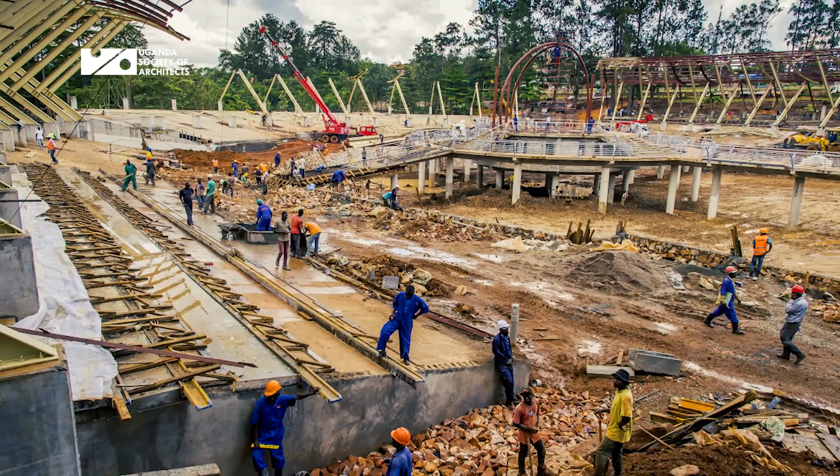My boss, architect Matoya, architect Ian Senkatuka, and architect Stephen Ochola handled the bidding process. Then myself and a colleague of mine called Martin Bongomin, and another colleague called Oyo Cuthbert, we were the boots on ground. The firm is called Creations Consult Africa Limited, also in Kampala, Nakasero Hill Road.

The client was the Catholic Church, and the legal entity was called the Registered Trustees of Kampala Archdiocese. It was led by the Archbishop and many of the other bishops, as well as the Shrine Rector, Father Vincent, who is at Namugongo. The government was involved as well, so we had quite a number of meetings with the Prime Minister's Office, Ministry of Works, Ministry of Tourism, and those were the entities responsible for the project.

The project was really to redevelop the UNESCO World Heritage Site, which is located in Namugongo. The whole estate is about 34 acres.

In 1886, Kabaka Mwanga, the king of Buganda, ordered the execution of martyrs. Some of the martyrs were killed right at Munyonyo, others were killed somewhere Owino Market currently is, and the rest were killed at this place. It was quite far at the time, maybe a 30-40 kilometer walk from Munyonyo. So the guys were killed and burnt at this place.

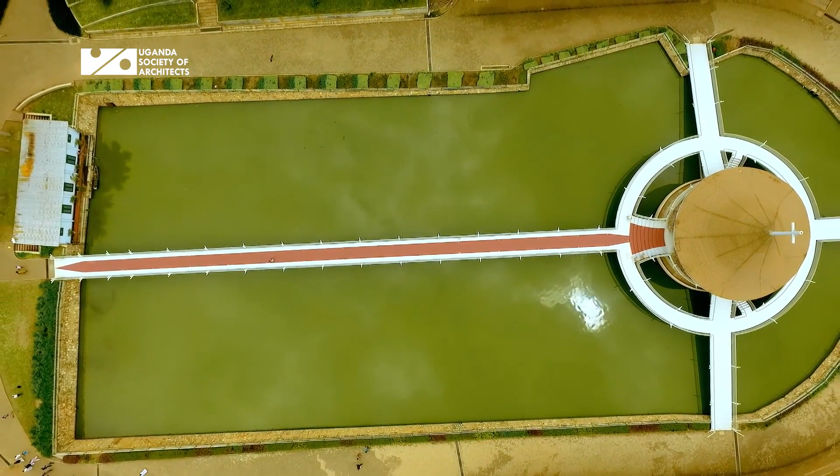What happened then was, after they were killed where the existing basilica is, the guy in charge of the execution was called Mukajanga. After Mukajanga and his people killed them where the basilica is, they went down to what was a swamp at the time and washed their blades and spears in that water. So people who are in the Catholic faith believe that this water is holy water because it has the blood of these saints.

The head of the martyrs at the time was called Balikuddembe, and he was killed right where the existing basilica is, and I think buried there as well. So that spot where he was killed is where the current altar is.

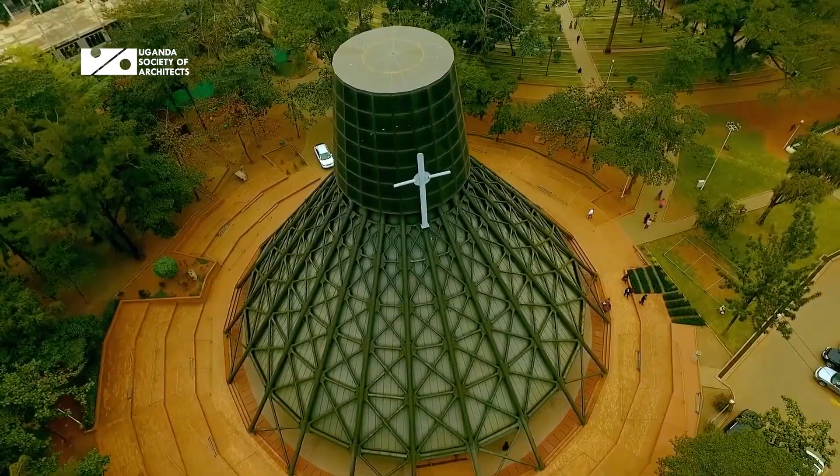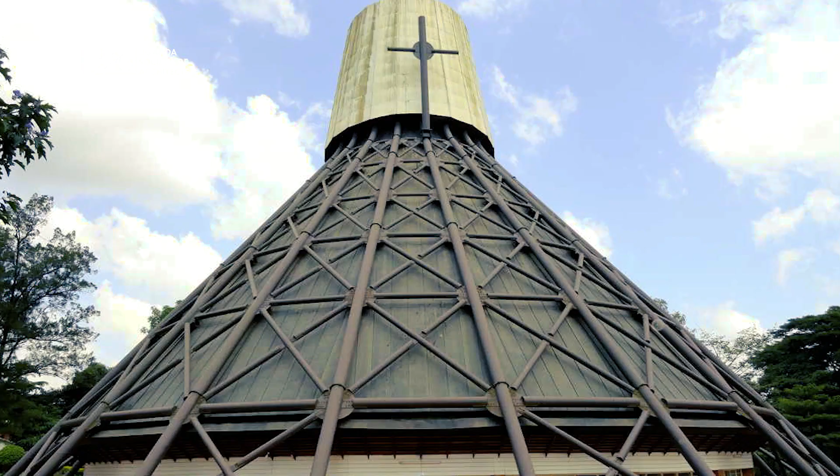Now in 1964, there's a whole process of making you a martyr, which is called canonization. That happened in 1964, and that's when this church was first built. Originally, it was built by Idi Amin when Pope Paul VI was coming to Uganda to make his pilgrimage to where these guys were killed, were executed. And so that's when that basilica was built.

Originally, it was just a shed, just a roof and a floor. It was built in the 1960s by Roko at the time. So when it came to choosing a contractor for this project in today's time, they looked for the same construction contractor, basically. So you'd find that from the fathers to the sons, the project had been shifted.

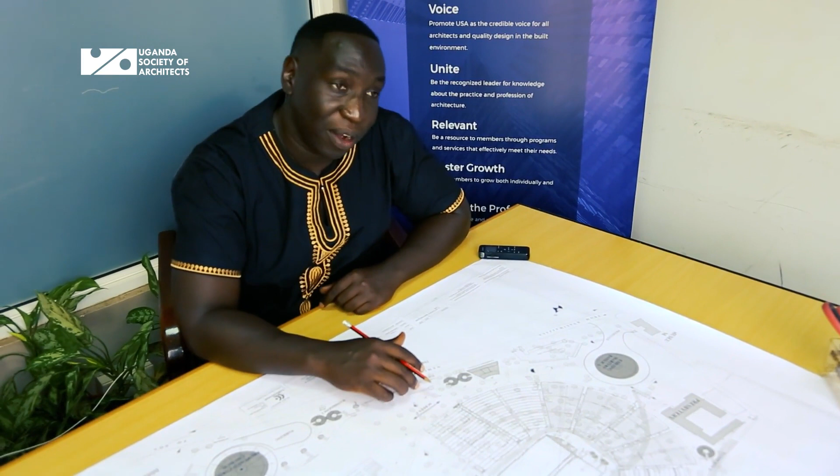What happens now is every year on the 3rd of June, which is the commemoration of their execution, there is a whole pilgrimage that takes place in this place. People walk from as far as Tanzania, from as far as Ethiopia. People walk all here to come and perform their pilgrimage. So what happens is you can have up to 1 million people on this ground, which is 34 acres.

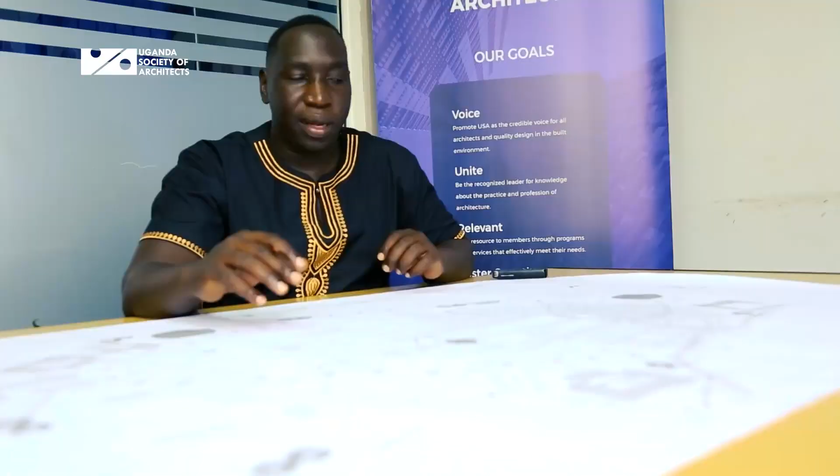So the project, because of having all those people, and Pope Francis was coming in 2015, the Catholic Church, together with the government, decided that we need to redevelop it and make it habitable for the 1 million people. Deal with issues of crowd control, washrooms, a place where people can camp. We wanted to add a new parish church so that we could leave the basilica for special events. We had to add parking for some very special guests. We had to clean up the lake, change the altar. There was a lot of work that went in.

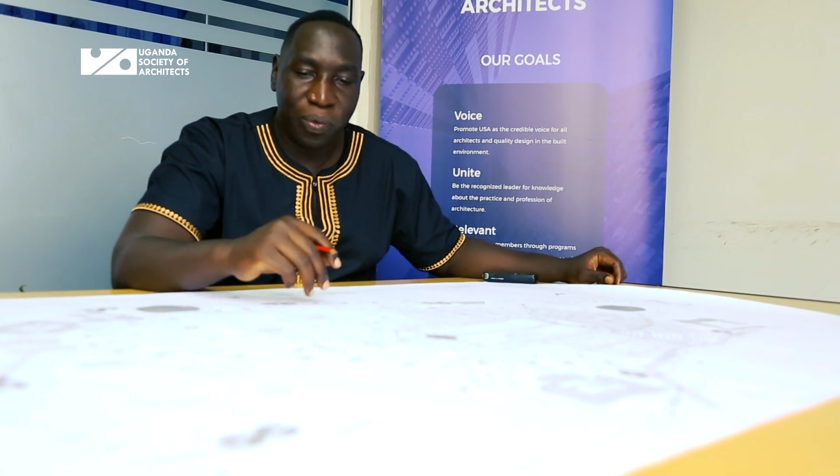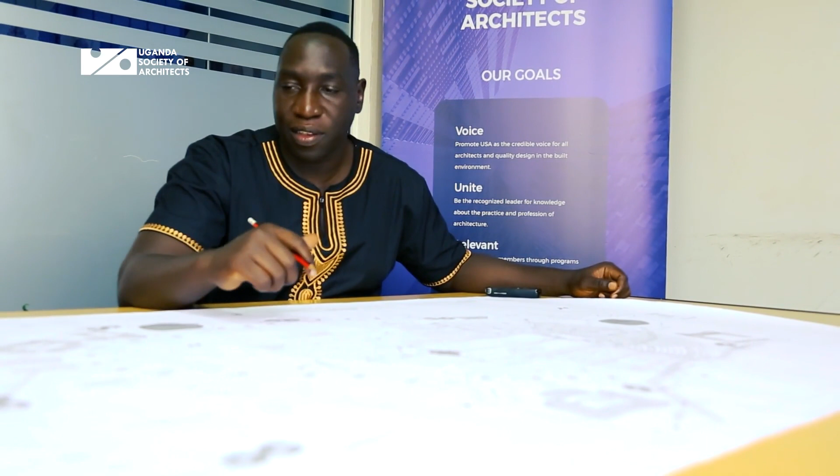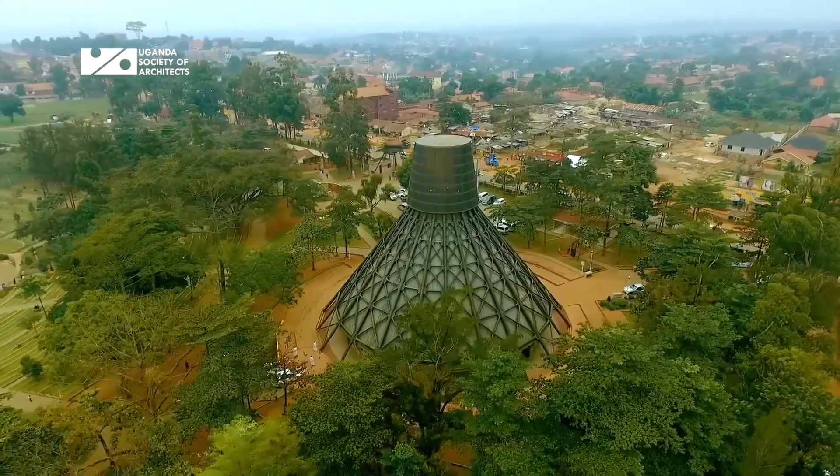In terms of budget, if anyone is thinking, it was about $16 million in total, and that was for phase one. There are still many other phases to do, as you'll see. So what we did, we took the whole 34 acres and tried to figure out what to do.

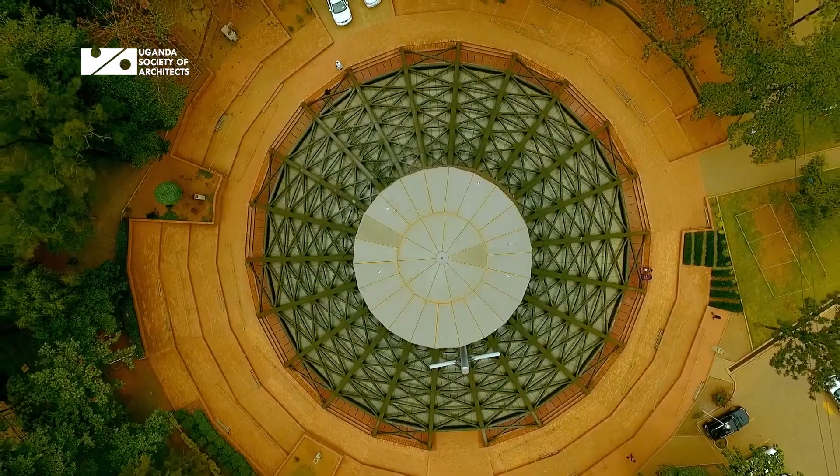And there were a number of things that had to be done. One was to renovate the existing basilica. Some parts of it were a bit old, some parts needed to be changed. So we did that. We changed the dome on top, which was metallic at the time, and now we made it glass so that it allows light in.

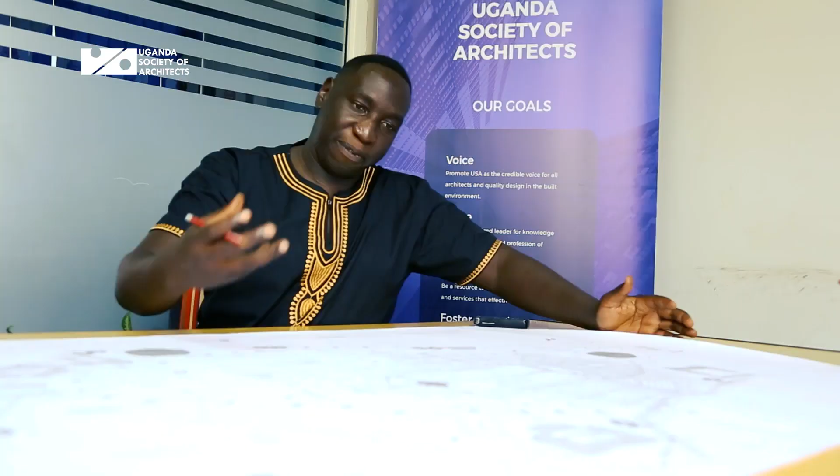We also added some ventilation up there to create a stack effect for ventilation. We are yet to build a new parish church, in this corner, which when built will reduce the pressure on the existing basilica.

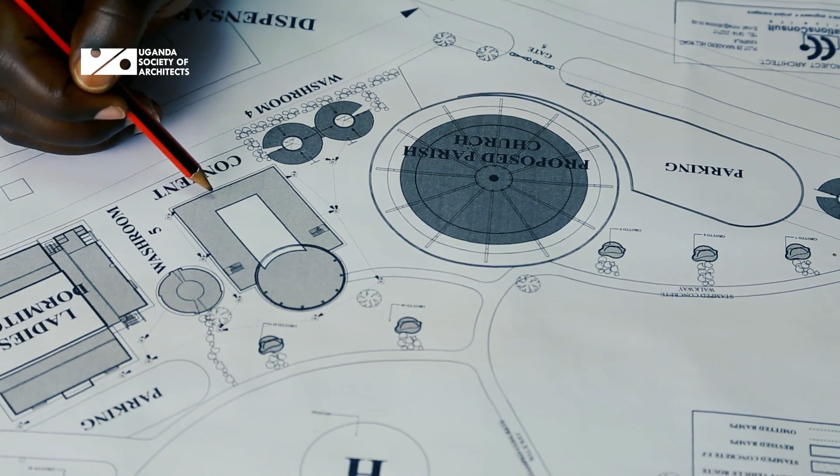The idea is to have a 1,000-seater church here. And then next to the church will be the convent for the nuns, because right now we only have a presbytery for the priests. So we need a convent for the nuns as well.

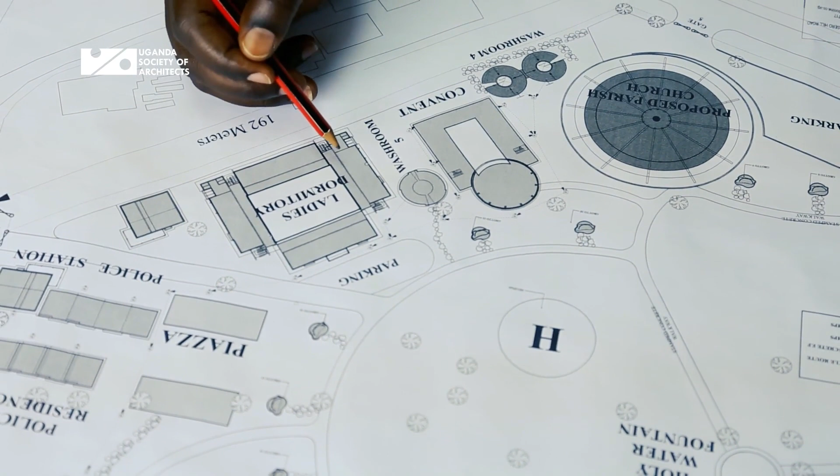And then there are those washrooms near it. Next to the convent is the ladies' dormitory. We thought the ladies' dormitory should be near the convent and also near the church. And since ladies are our mothers and sisters, we thought they should also be near the security command center so that they are well protected. The police station is also right there, so in case anyone tries to disturb our mothers here, the security is right there to handle them.

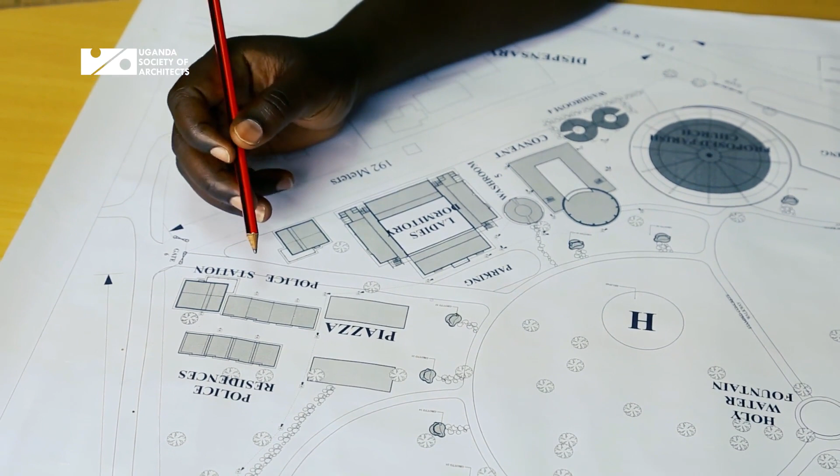We thought it's also important to create an area where people can buy a few things here and there without having to walk out. We decided to create this open area where some people can sell small things for the convenience of the people inside here.

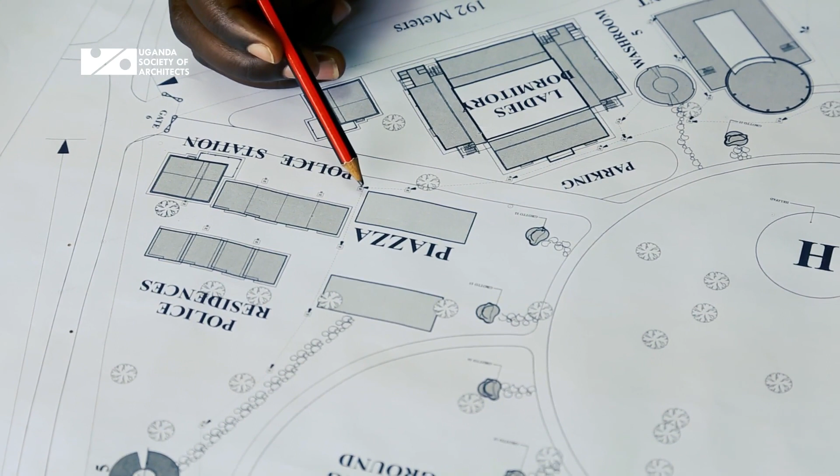And then that's the camping ground right there. This is the lowest part of the site, around here. This is where there was a lagoon originally, but we moved all of it down to the other new site, like I said.

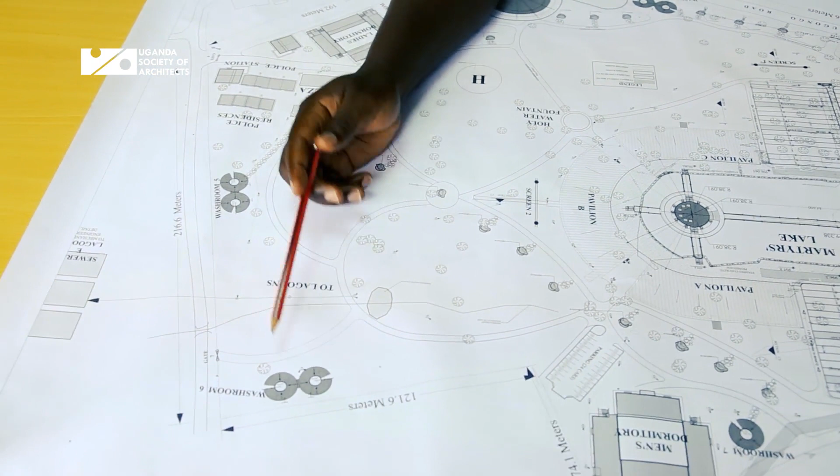Up there is another set of washrooms for people using Gate 7 and in this general area. Up here is the men's dormitory, near Gate 8. The men ideally should be able to take care of themselves, so we didn't need to add much more security detail around there. The presbytery, like I said, is here.

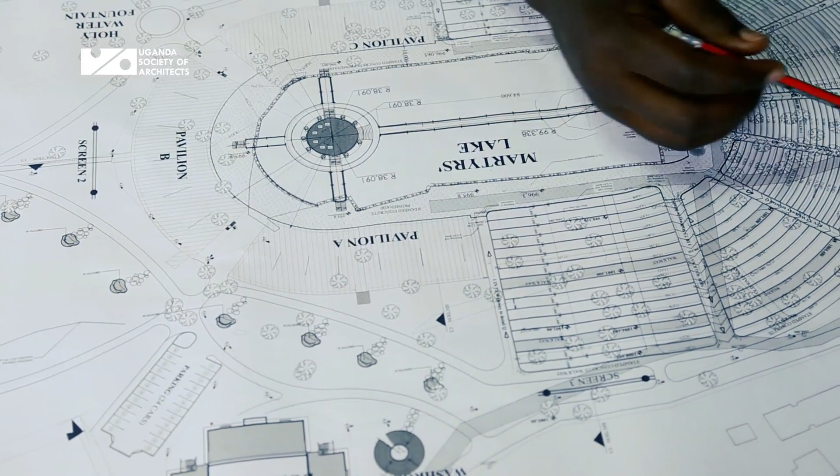We had to add washrooms in as many locations as possible to reduce the walking distance for each person.

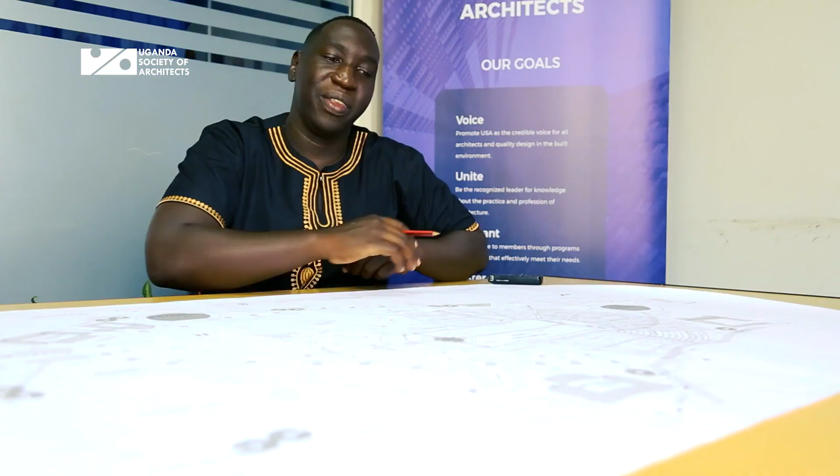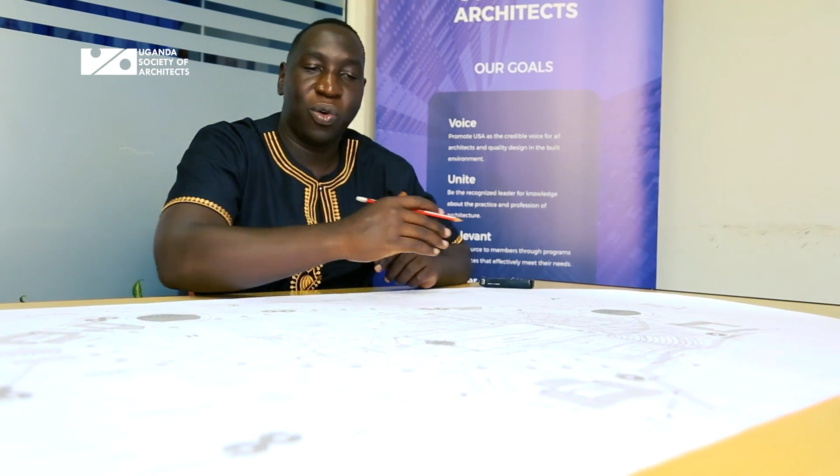For the altar, there was an existing altar in the lake, built sometime around 1993, preceding Pope John Paul II's visit. But that altar had become a bit old and it was short, so people could not see the main celebrant. So what we decided to do was move the altar to the back and raise it up so that everybody around could see the main celebrant.

So the idea is that out of the basilica and the presbytery, you can walk all the way to this main walkway, which leads you straight to the promenade and then to the bridge.

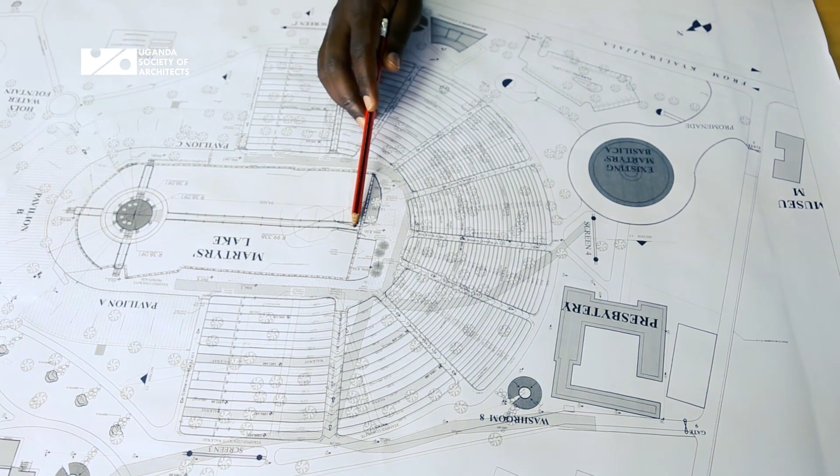This is the bridge, which is 84.6 meters long, which leads you to the main altar. And so that's the altar, and it also has enough access all around it, because on that day you can have 100+ priests all being part of the celebrants of the Mass.

And then we created these extra bridges. If let's say a VIP wants to come from this pavilion to receive Holy Communion, it's easy for him to walk, he doesn't have to walk all the way around like that. Same to that and that.

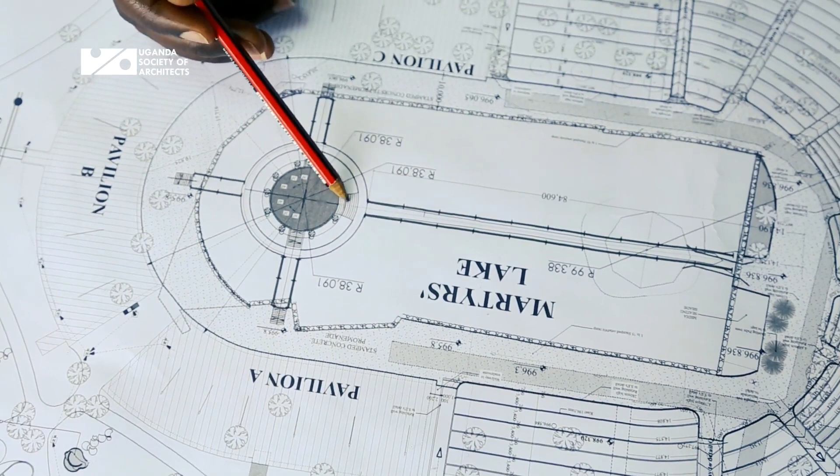It came out in a way that now when you look at it in plan, it looks like a cross. So many people think that we did this intentionally, but it came as it was, really for accessibility.

One thing you definitely can't avoid, because of the time in which the work was executed, it was very short. Of course, it was bound to leave some areas that require more maintenance because of the speed at which it was done, and there's a bit of oversight.

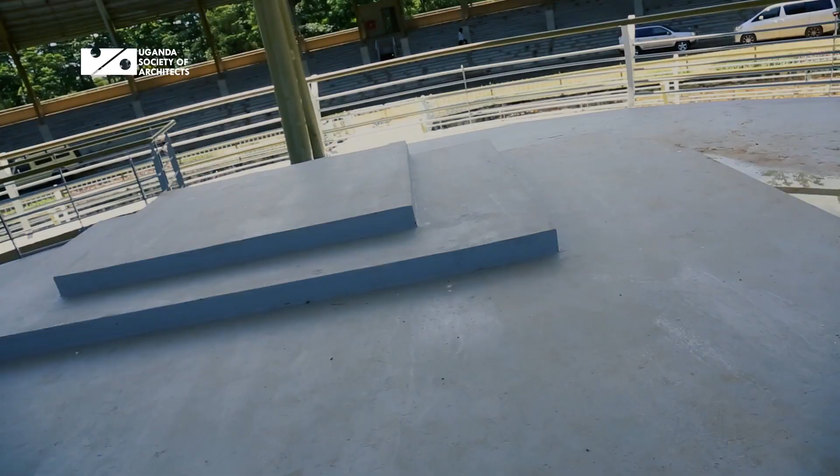Also, when we were designing this, as you will see in the drawings, when we were coming up with the altar, we had several designs for it. We researched the Pope's visits in different countries, like in South America, especially Brazil, and looked at the processions in Spain, and how the Pope was addressing the crowd. This was the ideal platform, as you see here, so you'd have him seated at the top, and on the side, of course, you would have his support.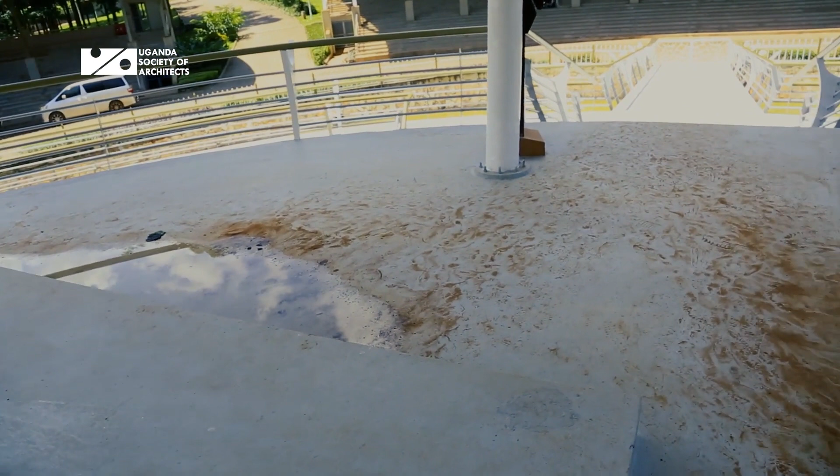Then the other fathers, priests, or the altar boys, and then of course you'd have the altar. So you'd find the pulpit is at the front, and that's where they take the readings from, and that's where they carry out all the sacraments and blessings that happen at the front. We had several designs for this. There was one supposed to be out of steel and timber decking that was slightly higher than this, but we opted for concrete because of time, and that's why it appears like this.

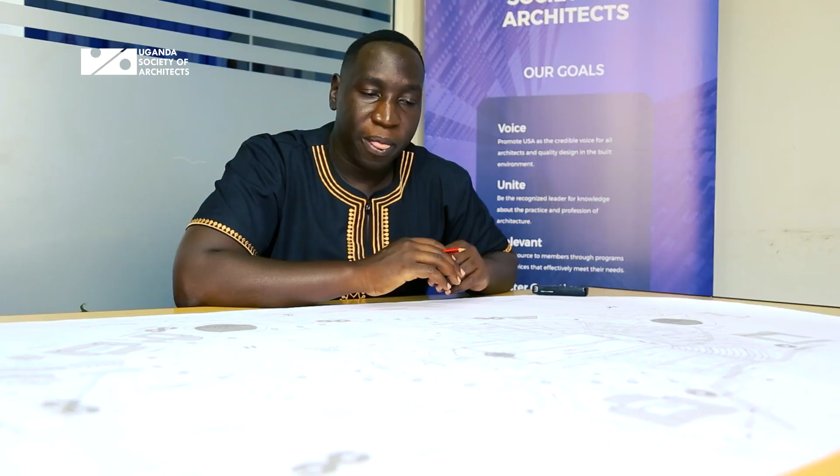We created a bridge over the lake because on the 3rd of June there's a very long procession when the priests come from either the presbytery or the existing basilica. It's about a 100-meter walk, so you can have a long procession of maybe 100 or 200-plus priests. What we did was create this red carpet, but we also wanted them to look like they are walking on the lake.

Part of our inspiration came from when Jesus walked on water, and Peter too, so we wanted to create that kind of walk. We also made it long so that when you're up here, the way we designed this red path makes it look not so long on this side, but when you're on the other side, it makes it look long. So we tried to play around with perspective on this.

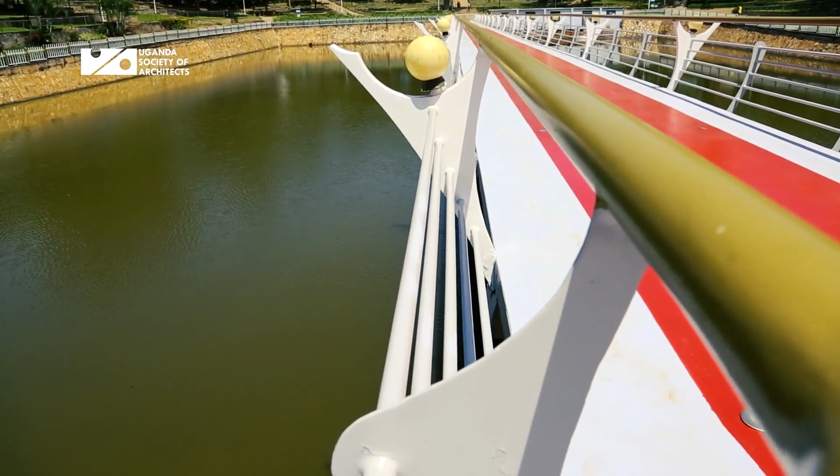Yeah, and then the lights, the railing, you can see we tried to... this one was something architect Oyo Cuthbert came up with. We added it in the design to give that illusion of an angel worshiping, singing praise as the procession walks down the aisle.

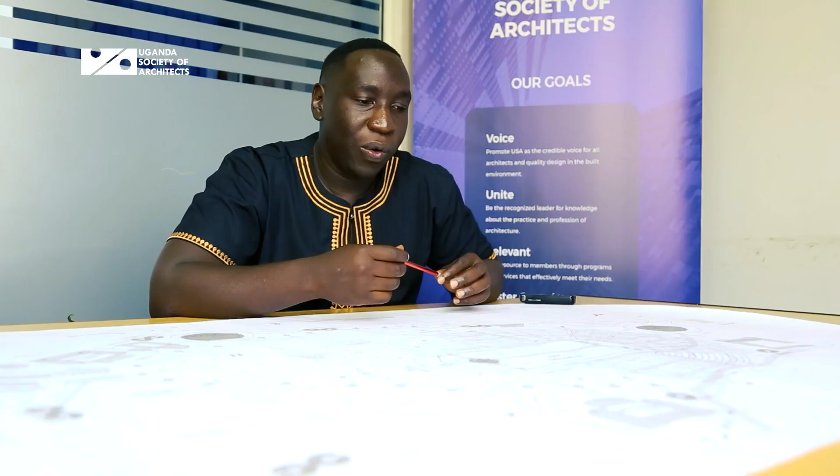Because we didn't want to overly intrude on the landscape, we decided to just create terraces so that people could sit in them. The terraces are, of course, inclined so that everyone can see the main celebrant. So we created something almost looking like a stadium, but of grass, because we wanted to keep the landscape.

If you look at the drawings, the steps are not all equal, because we had to accommodate some trees. Some of the smaller trees we had to cut, because we were trying to accommodate as many people within the space, but the trees affected the cutting.

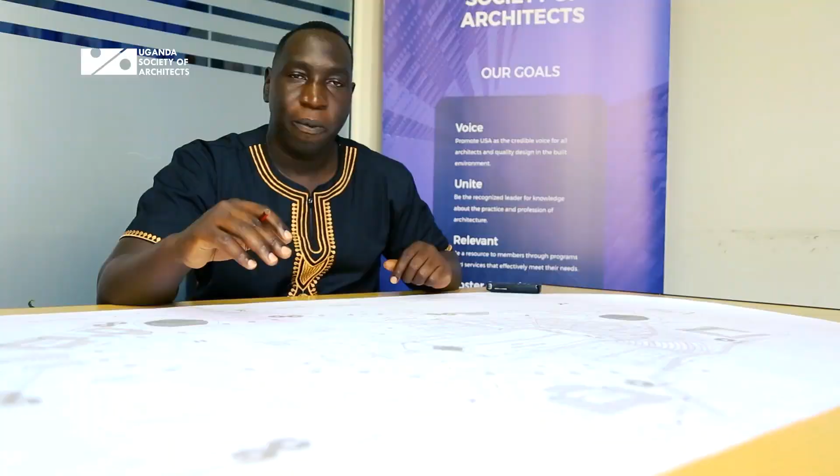Part of the instructions from the client was that no tree must be cut, because every tree at Namugongo has a name and is treated as a person as well. So our design had to fit within the existing landscape. We were only allowed to cut very few trees, the ones we could not save at all, but we tried our best to keep every single tree on the ground.

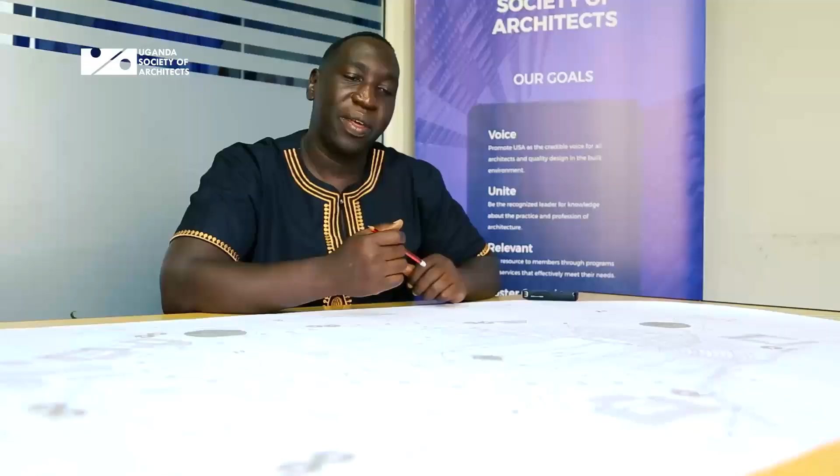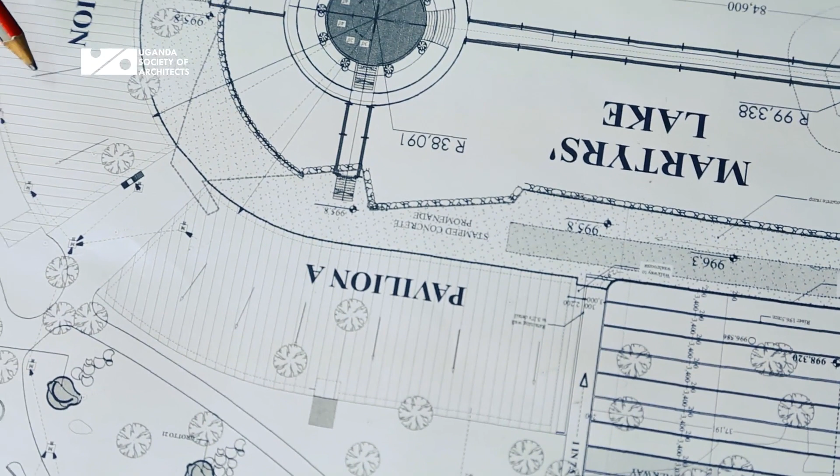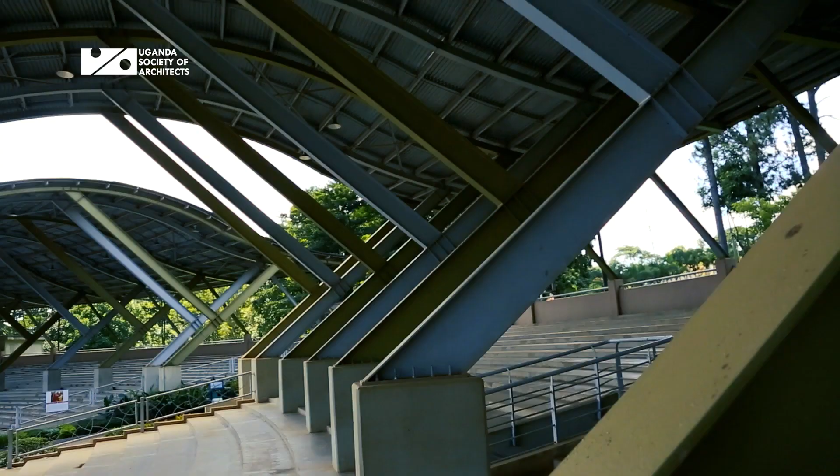Then on the lower side near the altar, we created pavilions—Pavilion A, B, and C. The instructions from the church were that their invited guests would sit in Pavilion A, the priests, brothers and nuns would sit in Pavilion B, and the choir and some of the junior clergy would sit in Pavilion C. Each pavilion is covered with a copper roof, which is also curved, to try and mimic the landscape. We didn't want a nice undulating landscape and then, out of the blue, have this straight thing, and that's why we decided to curve them in that manner.

We had a local company. I remember the boss was Lalani, and the guy on ground was called Krupesh Patel. Krupesh's team did the steel elements, and they had to curve these specifically for this project.

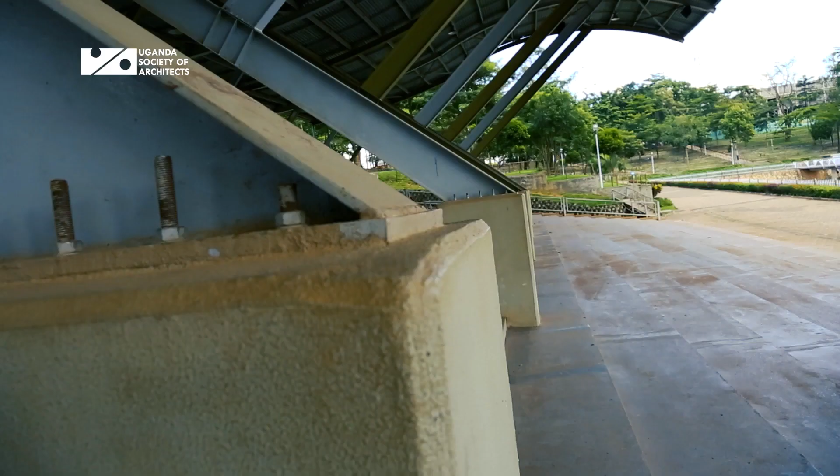For the roofing, we had to get a team from China, and the roof has 3 layers. We used a zinc alloy as the bottom sheet, then there's an insulation layer in between, and on top is copper.

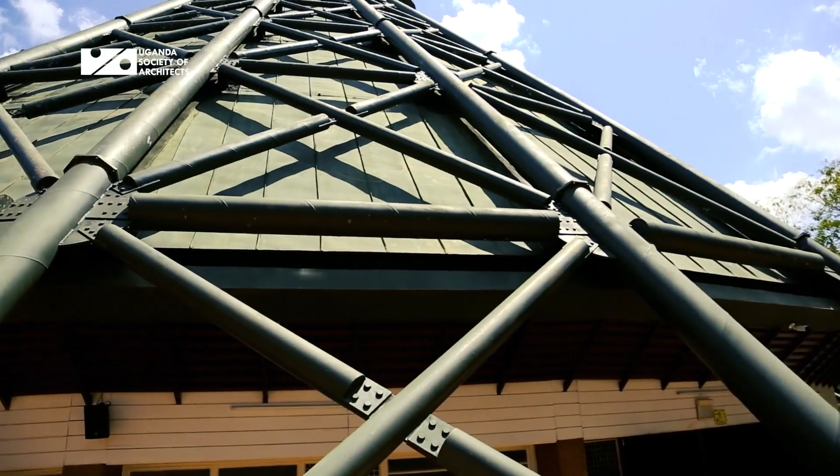The church itself is also made of copper. The whole roof is copper, one of the most expensive materials. When we go to the church we'll look at that, because we wanted to remove the panels and reassemble them at one point, but we decided just to brush them and repolish them there to get back the original color, then treat and paint them black.

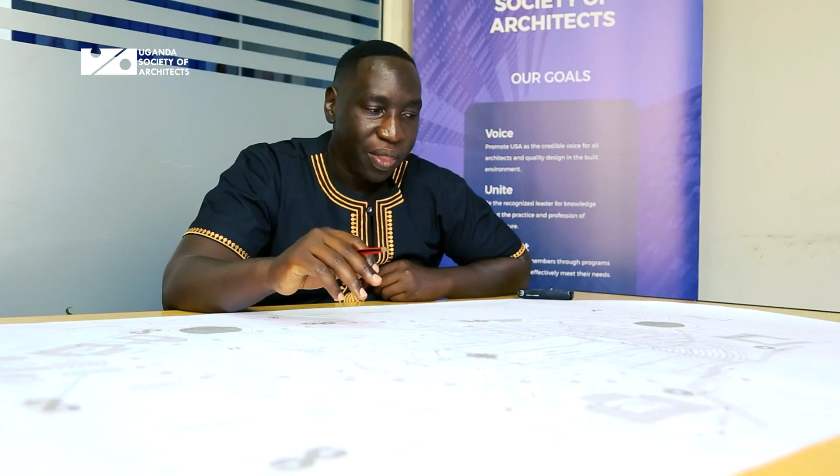We also created a trail, and put a grotto for each of the 22 martyrs. It's a very long walk, about half a kilometer or so. So if pilgrims want to go through that meditation process, they have a long walk, and can stop at each grotto, say their prayer, then move to the next.

A grotto is a sculpture representing a prayer point. It's a space where someone comes to express their feelings to God, talk to God, pray for best wishes in their life, or whatever it is they want to pray for. But these are also points for one to come and seek Holy Communion.

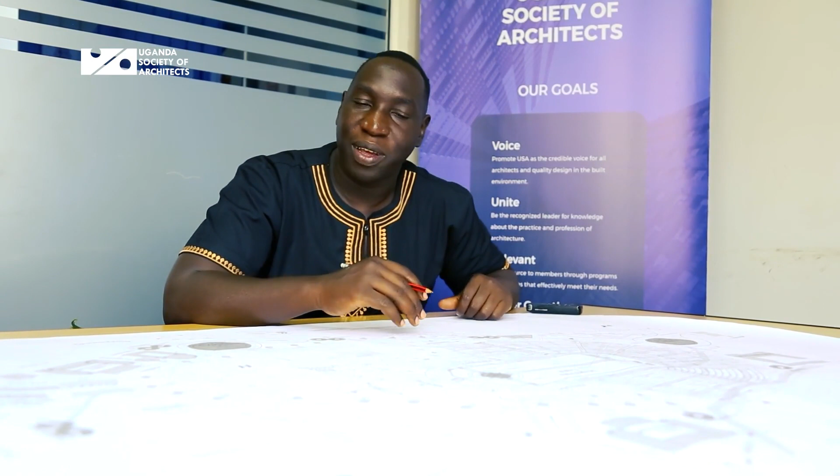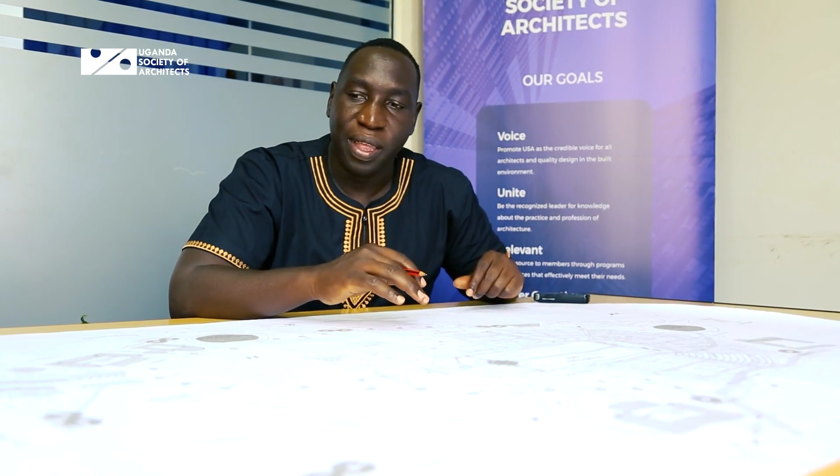Obviously, it's not possible to fit 1 million people in 34 acres, so we tried to accommodate as many people as possible. This place can accommodate up to maybe 200,000 people. But those 200,000 people may not all see the main celebrant, so we created big screens.

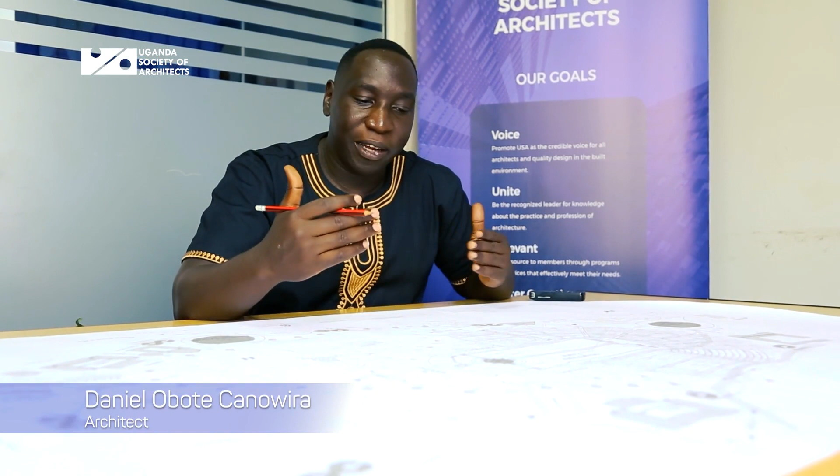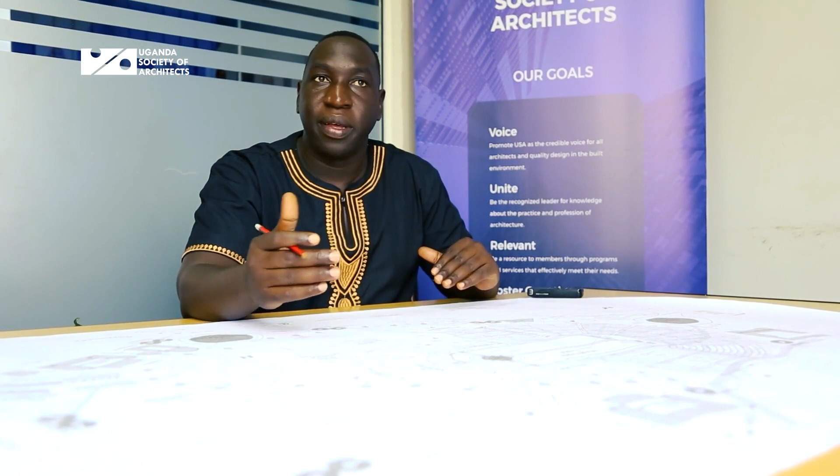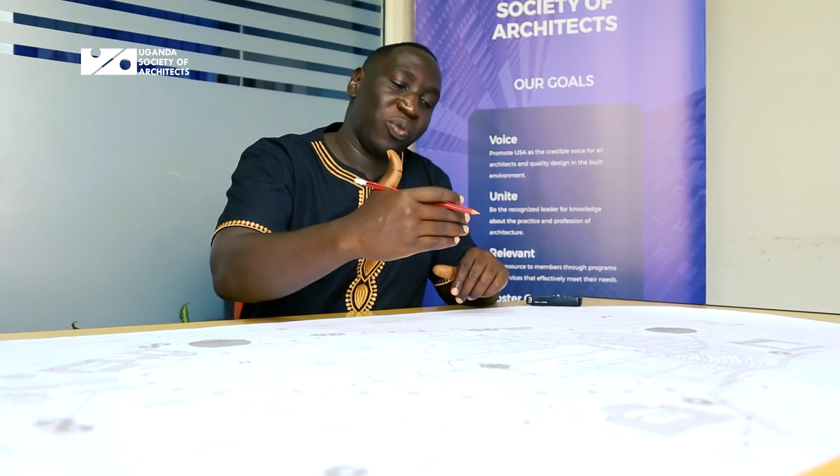These screens are about 24 meters wide and 12 meters tall. They are yet to be built, but when they are, they'll be visible from as far as maybe 500 meters or so. That way, everybody within the surroundings, whether inside here or not, will be able to take part in the celebration.

Those sitting in these areas can watch on these screens. So we have screen 1 here, screen 2 is there, screen 3 is there, and screen 4 is there.

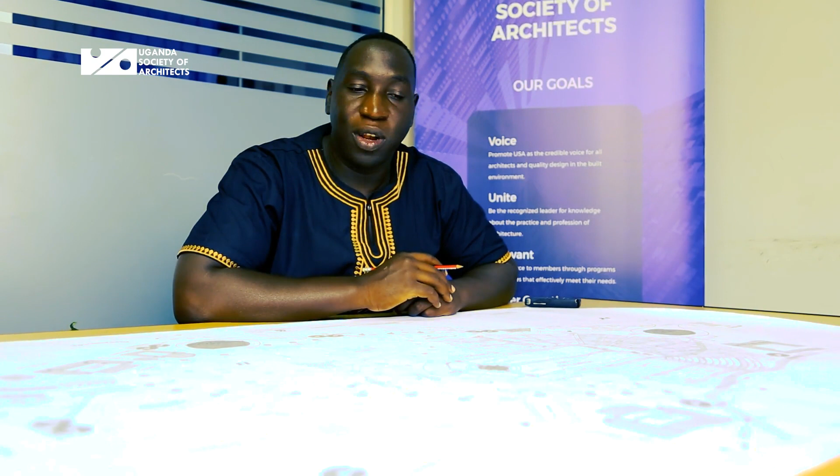We also created a holy water fountain. One of the reasons many pilgrims come to this place is they want to get holy water from this lake. But it was becoming a safety hazard, because people trying to get water were pushing against each other, so people could easily fall into the lake.

So we barricaded off the lake, put up rails, and created a buffer of plants about 2 meters wide. We then channeled the water to a fountain elsewhere, so you can still get your holy water without the risk of falling in.

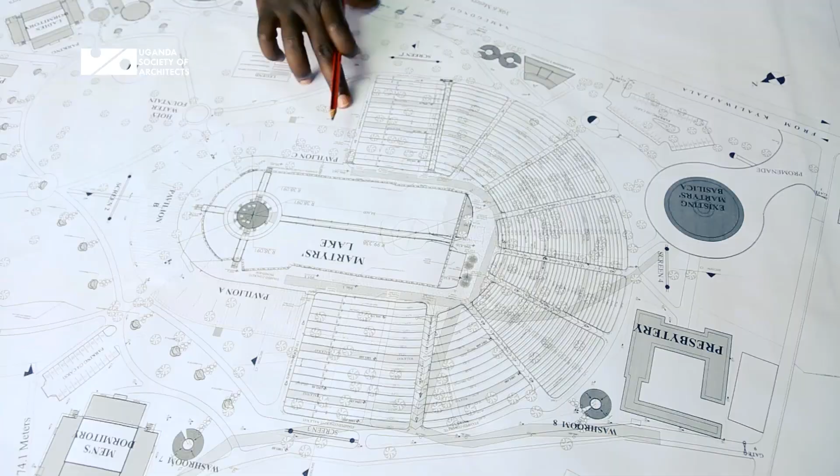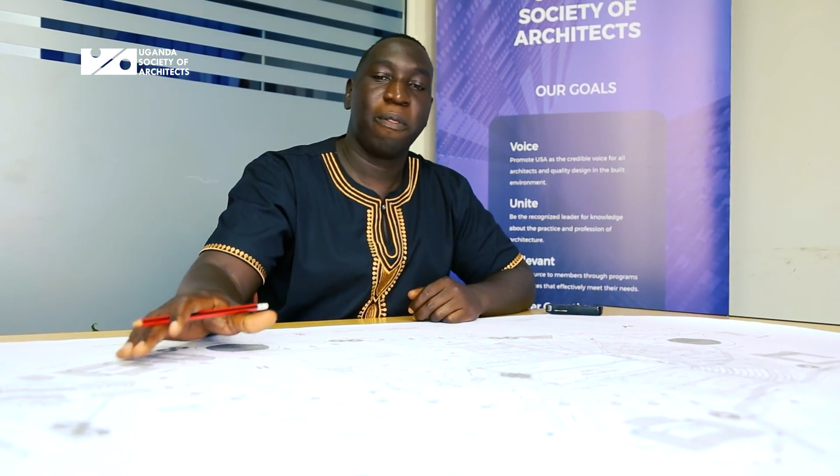We also created camping grounds for anyone who needed to come here. Pilgrims don't come only on 3rd June, people come throughout the year. Eventually when the dormitories are built, people will be able to sleep there, but there's also a camping ground for those who may not be able to manage the dormitory, or if the numbers are too many.

In order to make the place viable in itself, underneath some of the pavilions we created rooms people can utilize like conference rooms, so they can have events, trainings, small functions, and it can generate income to help maintain this area.

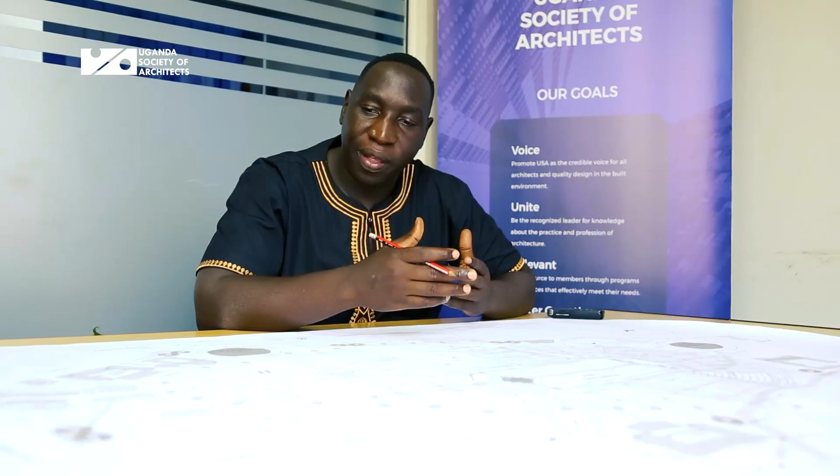The large gardens can also be utilized for functions, and our thinking at the time was that if people can pay some money to use this place, that money can be used to maintain and sustain this place.